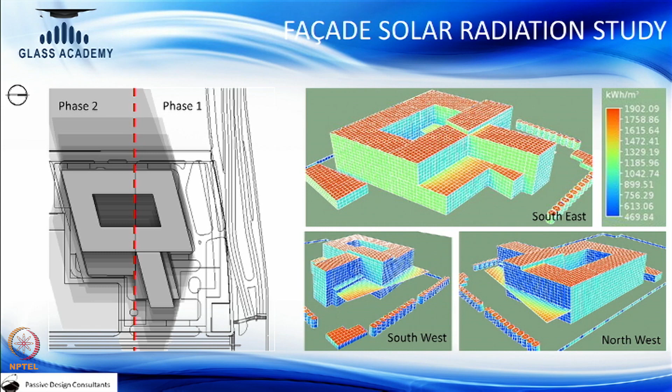It was observed that the front facade was actually the north facade, and through solar radiation we validated that we were getting the minimal amount of solar radiation falling onto the north facade, while east, west and south were getting relatively much higher radiation as expected. Roof was obviously getting the maximum solar radiation, which could be developed for harnessing solar energy through solar PV panels. We developed the energy model for the project.

You would see that the project was designed to be like a glass box, which primarily had glass on all the 4 facades with more than 80 to 90% window to wall ratio. These are the parameters which were considered. If it's a conventional building, what is generally used is shown here as business as usual, with all the parameters for brick walls, roof having brick bat koba.

Typically business as usual buildings have 20 to 30% window to wall ratios, but this building was having almost 80 to 90% window to wall ratio. In comparison, when we compare ECBC values, U values for walls and roof are much more stringent as compared to business as usual. The window to wall ratio is also limited to 40% as given in ECBC 2017. All other values were majorly much more stringent in ECBC.

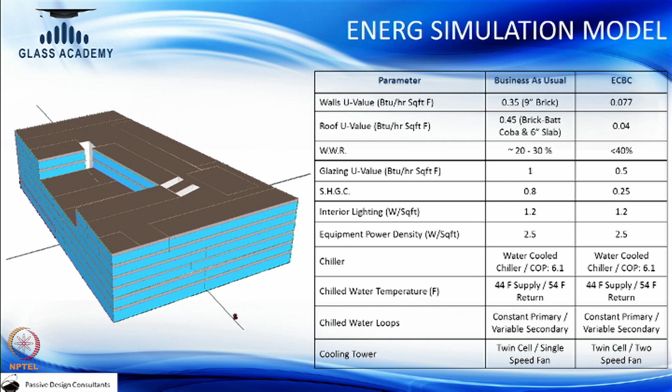I won't be going through the lighting, equipment and air conditioning part of it, as we are majorly focusing on the building envelope and the facade strategies. So, through building simulations for this particular case, we showcased to the client how having such high window to wall ratio could really have a detrimental effect and poor performance of the building.

We showed them how if we further reduce the window to wall ratio, the amount of glass on the facades, we can reduce not only the energy performance index, the kilowatt hours consumed per square meter per year, but also the overall chiller tonnage or the air conditioning load. If the chiller tonnage is significantly reduced, that will also help us in reducing the capital cost of the building, not only the operational cost.

The simulations showed that if the window to wall ratio was optimized somewhere around 30 to 35%, that would be the tipping point, where between 30 to 40% is the most optimal solution for this particular project. If the window to wall ratios are reduced below 30%, the energy savings would start reducing. The reason is the daylight ingress will start reducing significantly in areas which could be potentially well daylit, and that would lead to more use of internal artificial lighting.

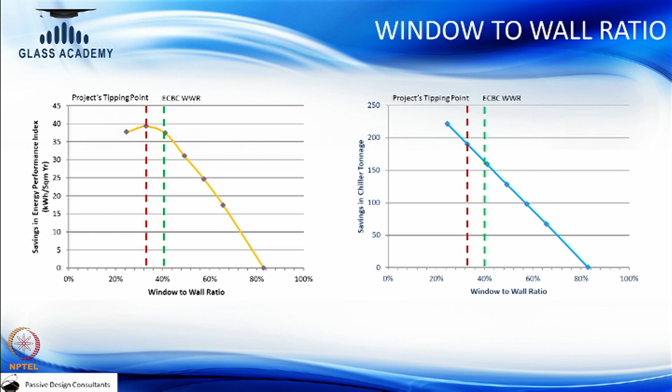So, as a guideline, the study showed that having window to wall ratios for this particular project between 30 to 40% would be more optimal, and that would also help the client to reduce their chiller size in this particular project by almost 175 tons.

Further, we showed what would be the impact of solar heat gain coefficient or the heat gain of those windows in the project. We started with having SHGC of 83%, which is for a 6 mm clear single glazing, and checked different glass options available to us with reducing solar heat gain coefficient from single glass to double glass.

We realized that the relationship between savings in energy consumption of the building and tonnage is quite linear in correlation to solar heat gain coefficient. The more SHGC we reduce in the project, lower would be the energy consumption and lower would be the heat gain.

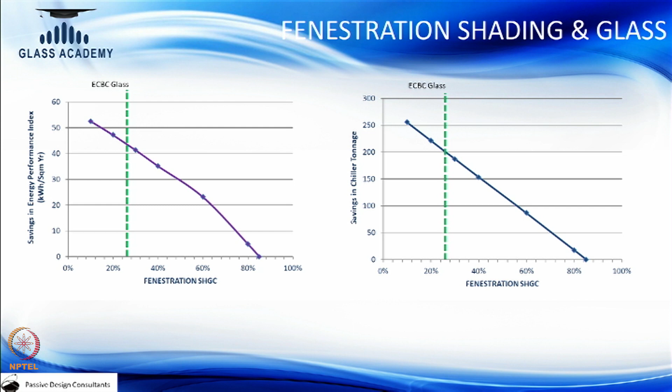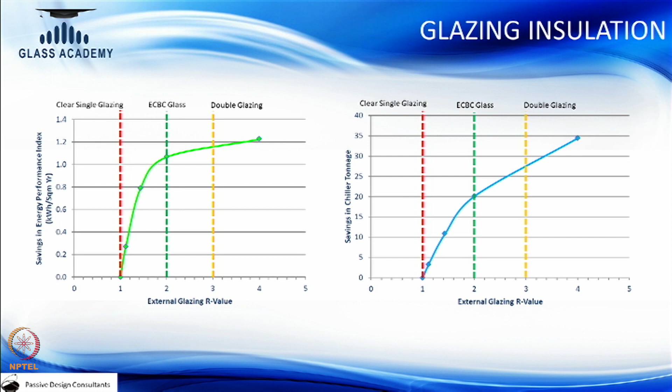Further, we also checked what would be an impact of glazing insulation on the energy performance of the building and the heat gains. It was observed in the project that the heat gains or the energy consumption, because of the U value, would saturate almost after we achieve R value of 2, which was also an ECBC recommended glass U value. Beyond that, if we keep on increasing the insulation, the savings were not significant, either in terms of energy savings or chiller tonnage savings.

For the facade insulation and wall insulation, we checked where do we fall in comparison to ECBC recommended prescriptive values, and 250 mm AAC brick wall or masonry work was proposed ultimately in the project. It was proposed primarily because through these simulations, through these graphs that we are presenting here, we realized that beyond R10 value, the savings were not as significant as they were before, and even reaching a point where the insulation is matched to ECBC prescriptive value, it will not lead to significant energy savings. However, the capital increase in the project cost would be significant. So, we recommended to the client to stay with 250 mm AAC blocks, which would give us R10 value in the project.

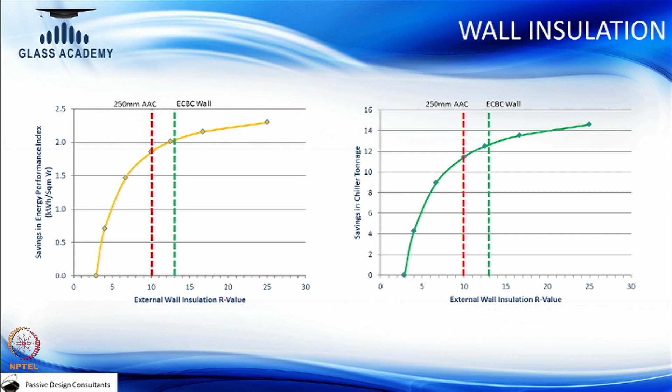As a summary of the studies conducted for this particular project, we realized that if the project had been a conventional building, having all the conventional building parameters like 9-inch brick wall, non-insulated roof with just brickbat coba on top, single clear glazing and so on, the project would achieve an EPI value, energy performance index, in kilowatt hour per square meter annually, of 436 kilowatt hour per square meter.

However, through different facade optimization strategies like good daylight harvesting, by integrating daylight sensors in the perimeter spaces, by insulating the roof, by having high reflective finish on the roof, by using AAC block work for the exterior walls, having high performance DGU for the glazing with SHGC value of 25%, further improving the solar heat gain coefficient by having 1200 mm deep horizontal shades on south, east and west facade, and reducing our window to wall ratio to 30%. With all those strategies, we could reduce our energy performance index from 436 kilowatt hour per square meter to 347 kilowatt hour per square meter.

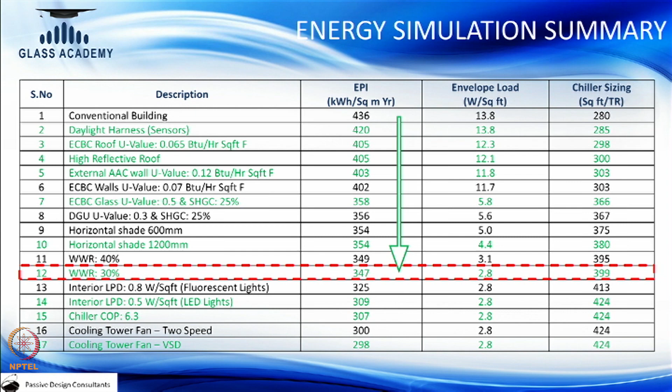This also reduced our building envelope load from 13.8 watt per square feet to 2.8 watt per square feet, and the chiller size would be reduced from 280 square feet per ton, which is generally there for a conventional building, to almost 400 square feet per ton. So, with only strategies involving facade, we could reduce the chiller tonnage to 400 square feet per ton, which is in my opinion quite well performing.

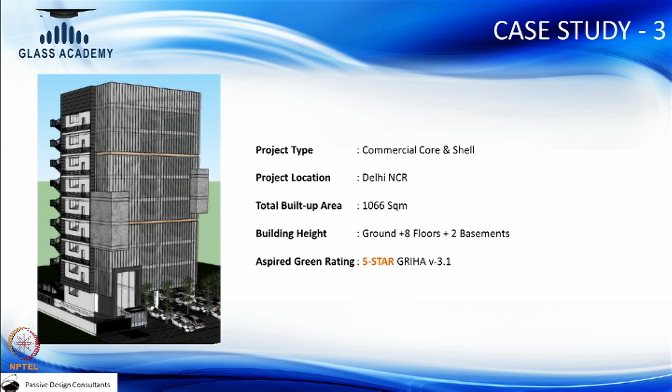Moving on to our case study 3. This is also a commercial core and shell building located in Delhi NCR. This had a total built up area of approximately 1000 square meter with building height ground plus 8 and 2 basements. This particular project is aiming for a 5-star GRIHA rating under version 3. I'll just quickly take you through the third case study, showing you what we had initially. When the architect gave us the project, only 65% of the area was achieving good daylight.

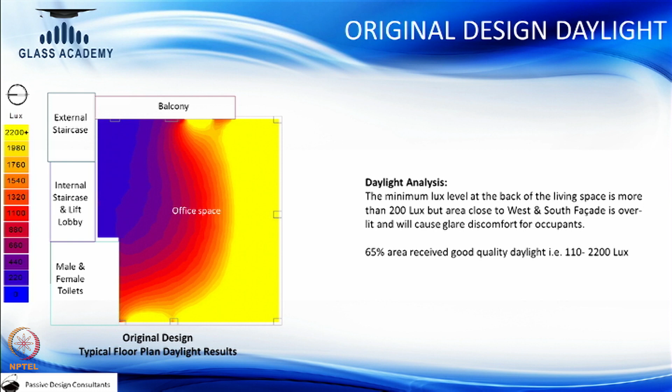This was the area which was receiving good daylight between 110 lux to 2200 lux. However, the project also had significant glare problem from the south and western facades, which must be optimized in order to really harness good daylight in the building and to improve the energy efficiency of the project.

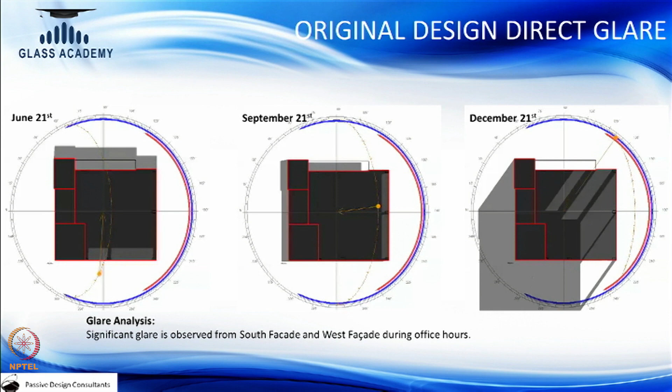We showed to the client through the glare analysis that on summer solstice there was significant glare coming in from the south and the west facade. The east facade also had little glare, but that glare was not really a problem for this project, since this project was an office building and the glare was only there till 9 or 10 am, and typically office buildings start working after 10. So, we were not really so much concerned about glare from east.

So, after many iterations and many design solutions, we reached to a level where we proposed to the client an origami inspired external shading device. The shading devices would be static. These are not dynamically operated shading devices. The shading devices were designed to have at least around 40% open views, so that the views are not 100% blocked for the people who are sitting inside, while the shaded area would be more than 62%.

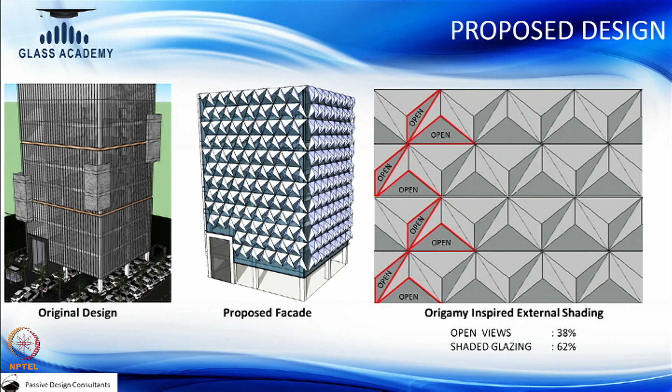And on this slide we show you how the original design looked, and with the proposed facade it would actually have a better aesthetical statement, and this facade would also work well. The studies here show you how we were receiving almost minimal glare or negligible glare during office period from south and the west facade in both June and September.

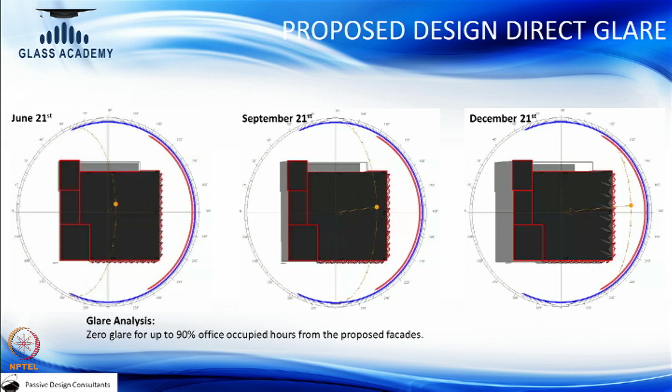While in December there was a little glare, but again, in the month of December or during winter, outside conditions are primarily foggy and there won't be much direct sun available. So, this is not really a problem. So, with this design, the glare was prevented and zero glare was observed for more than 90% period in the project with the proposed facade.

The project was achieving 97% well daylit areas receiving daylight between 110 lux to 2200 lux. In the proposed design, we were not required to go with the high performance DGU. A clear double glass was proposed, as the external direct solar heat gain was primarily prevented through external shading devices. So, tinted glass or high performance double glass was not really required. This kind of clear glass would have a VLT of 70%.

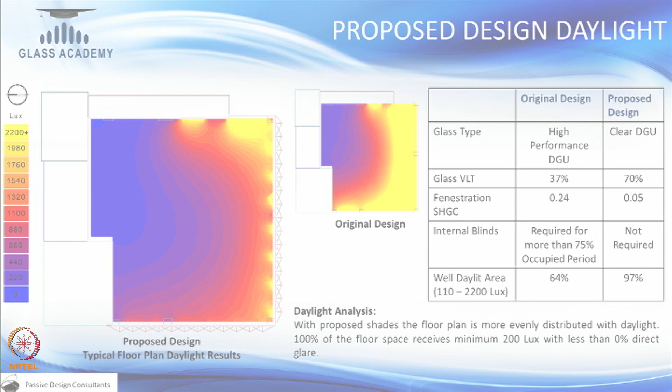The overall effective fenestration SHGC was calculated to be only 5%, which is much below even the ECBC recommended 25%. The internal blinds were not at all required in this particular building design, as the external shading devices were quite effective. And like I said, more than 97% area was getting 110 to 2200 lux. Only 3% areas were getting more than 2200 lux, which was next to the southern eastern facade because of the clear DGU glazing. With this, I will be concluding this session.

I believe the takeaway from these case studies is that, one, we need to go for integrated design approach. An integrated design approach not only looks at the energy performance of the building, but also looks at well daylit interior spaces with good quality daylight, not just high amount of daylight where glare is a problem. So, well daylit spaces with zero glare and with good energy performance would lead to a good performance facade, which can only be achieved through integrated design approach.

For an integrated design approach, we definitely need building simulation tools. These tools help us predict the performance of the facade and the building in advance, and not leave us to the end product later, where the building is built and then we realize that the facade is not performing. So, we can actually prevent such cases through building simulations. They are really good tools that we have available in the market.

And thirdly, ECBC prescriptive requirements which are given to us as a guideline are quite effective in actually achieving a high performance building facade. However, by using building simulations, we can negotiate with those values, still have high performance values while minimizing the overall project cost. Thank you.